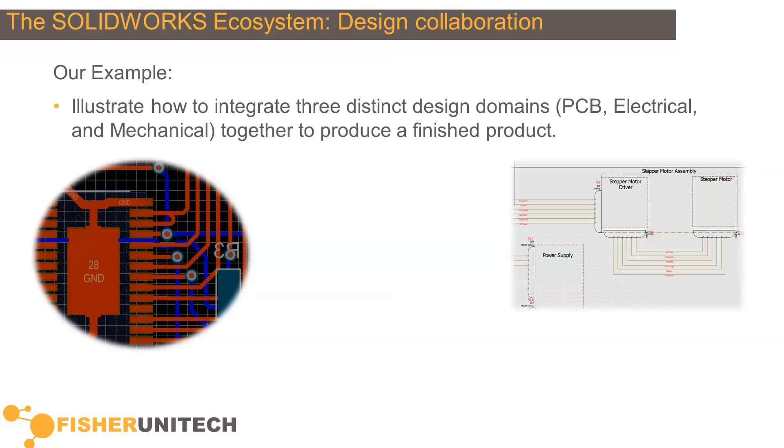All right, so what I want to do is illustrate how to integrate these three distinct design domains. We're going to look at the printed circuit board design, the system electrical design, and the mechanical, and how to put them all together to produce a finished product. And don't worry, I'm not going to do slides all night. We'll get to the software in a minute.

In order to do this, I'm going to be running three separate pieces of software: SolidWorks, SolidWorks Electrical, and this new product called SolidWorks PCB, previously known as PCB Works, which is from a company called Altium, if you're not familiar with them. If you look at our electrical product portfolio, you'll see SolidWorks PCB there as they continue expanding that whole product line. So you'll probably see a lot more in the electrical area from SolidWorks this year.

I put this design flow together, and this is what I call a traditional design flow. The way the products interconnect, you don't have to follow a flow like this. You can pretty much come up with any design flow you want, but this is the one I'm going to use tonight. We're going to start in SolidWorks and define the board outline,

and then push that over to PCB Works, and look at how those two things interface with the collaboration server, and we'll do some system wiring in SolidWorks Electrical. We'll jump back into SolidWorks to do the integration, and then follow it up by looking at how design revisions work between SolidWorks and SolidWorks PCB, and how we can get some of the copper information out of the circuit board for doing thermal analysis and stuff like that.

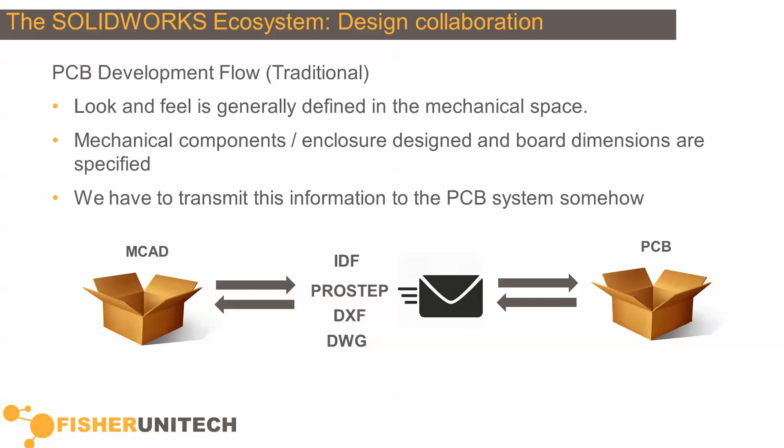The way it's typically done is the mechanical designer will generate a neutral file like a DXF or a DWG or EIEIO, and either email it or put it up on some shared storage device. Then the PCB designer has to take it, massage the data, jump up and down, swear a lot, and eventually get it into the PCB tool where he can do his component layout. And then at some point we have to update the mechanical space, so you have to reverse the whole thing. This goes on back and forth until you end up with something that looks a lot like this, which is really not what you want.

So what we're going to do is take a look at a little bit more of a desired flow here. One in which what we'd like to do is start on the mechanical side, creating the enclosure, defining our mechanical bits, and at the same time the PCB developer can be creating the schematic, doing circuit simulation, stuff like that, until we get the board shape defined where we can just push it across the table basically

over to the PCB space where we can do our initial component placement, push it back across the table into SolidWorks where we can check placement, we can do our interference checking, edit the assembly if we need to, and then push it back across the table so we can take it now and route it, and then the workflow will carry on from there.

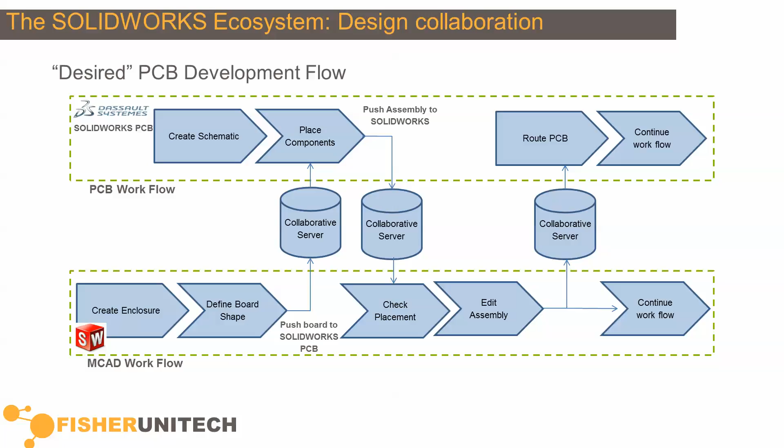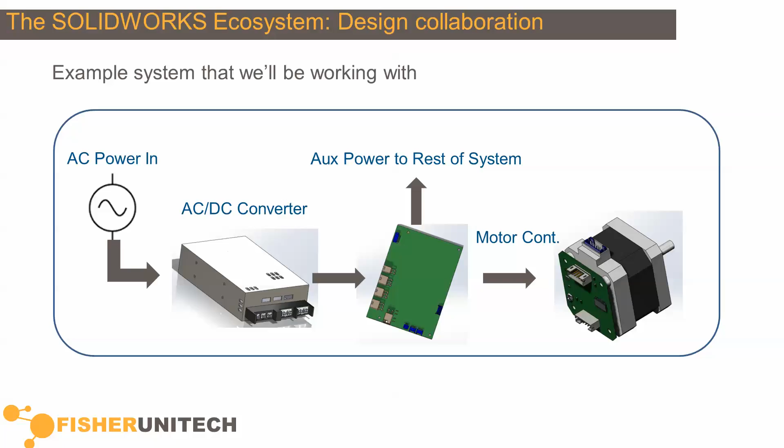So here's the system, and it's a simple example here, but basically we've got our AC power coming in, we've got our power supply, which feeds our main controller board, and there's secondary power supplies developed on there which are fed out to the rest of the system. And then we also are talking to our stepper motor, which has a stepper motor driver board, and that's actually where we're going to start our design here tonight.

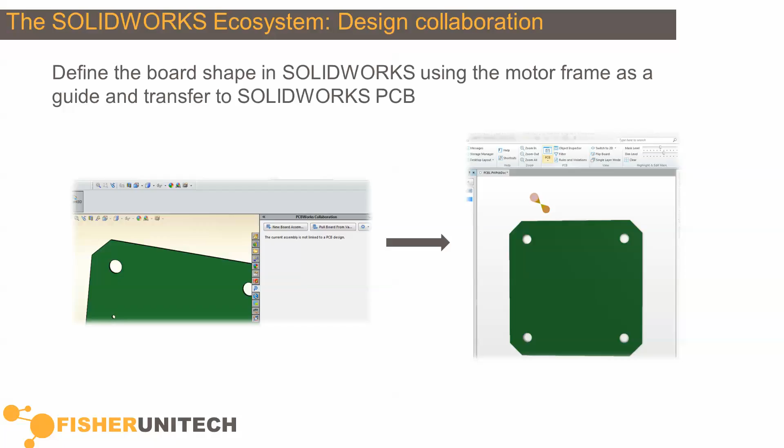And the way we're going to do that, like I said, we're going to define the board shape in SolidWorks using the motor frame as a guide, and then we're going to transfer that over to SolidWorks PCB. And the way we're going to do that is we're going to use these collaboration panels that we have in the applications. Once we do that, we're going to place the components in SolidWorks PCB, and then we're going to push it back over to SolidWorks so we can do our interference checking.

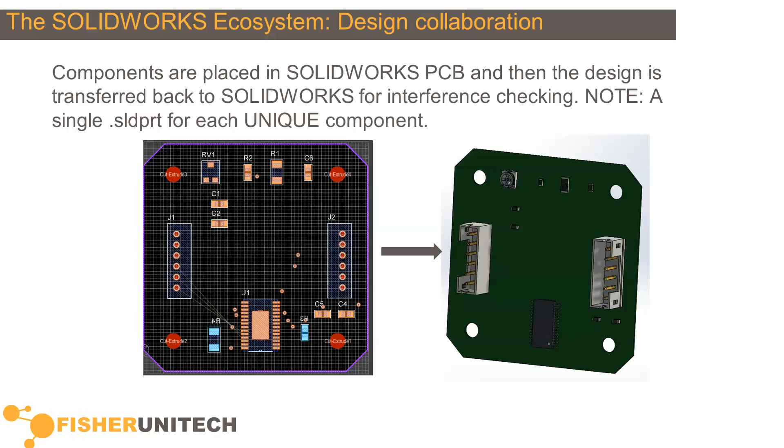And when we do that, we're going to create native SolidWorks SLDPRT components. But if we have like 150 bypass caps, for example, we're not going to create 150 SLDPRT files. We're only going to create one for each unique component, which is a little bit different than what happens with a lot of these neutral file translators. So something to keep in mind.

When you say interference, is it mechanical or electrical? Yep, mechanical interference, yep.

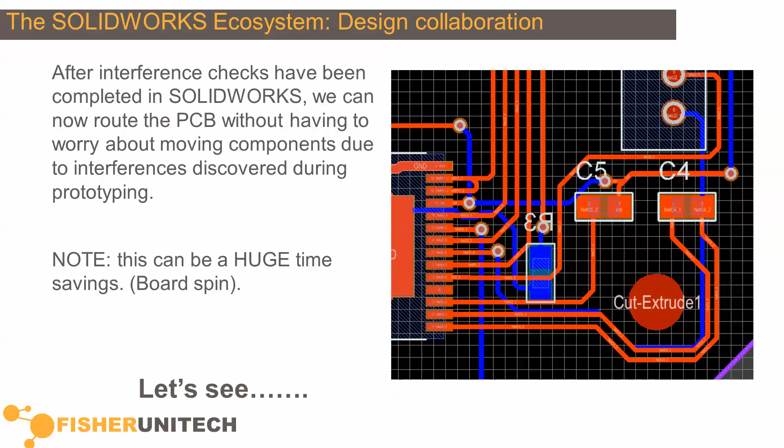So after we do the interference checks, then we can go ahead and start routing the PCB without being too worried about finding out some surprises when we get it back from prototyping. And this is where you can save a huge amount of time, because you want to make sure you get all those checks done before you do the routing, because if you have to do that after you've routed the board, then that's when you can really lose a lot of time. So let's go ahead and take a look at how we can do that.

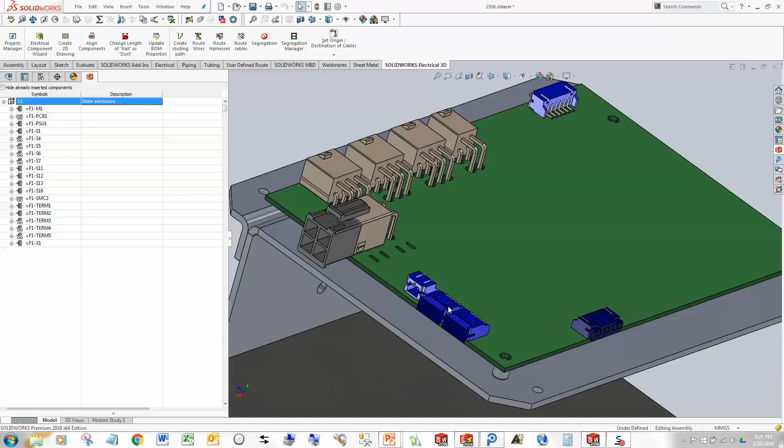So I'm going to start right here in SolidWorks, and you can see it's a simple little project, but we've got our AC input here, got our power supply, we've got some bracketry to bolt it all to the rest of the assembly, and then we've got our main controller board here, and then here we have our stepper motor, and that's actually where we're going to start things out, because this is where we want to define our board shape here.

And the way we're going to do that is we're going to click over here. You can see we've got this collaboration panel available to us. We're just going to go ahead and create a new board assembly, and we're going to link the assembly to a project that's already been created in PCBWorks or SolidWorks PCB. So we're going to just go ahead and click OK, and then we just have to save the assembly, as soon as my hard drive wakes up.

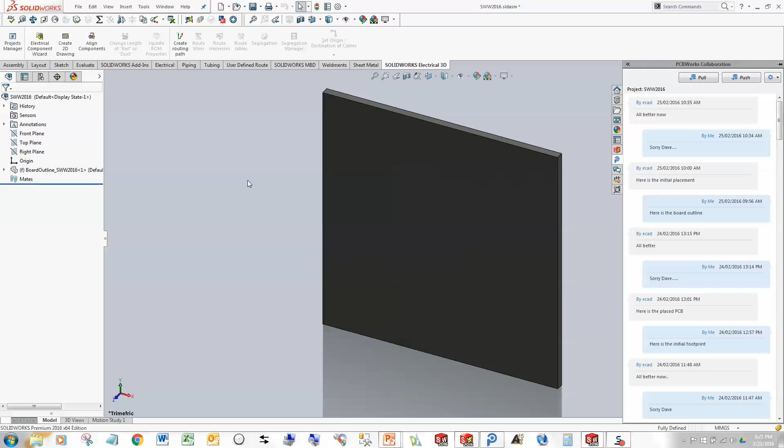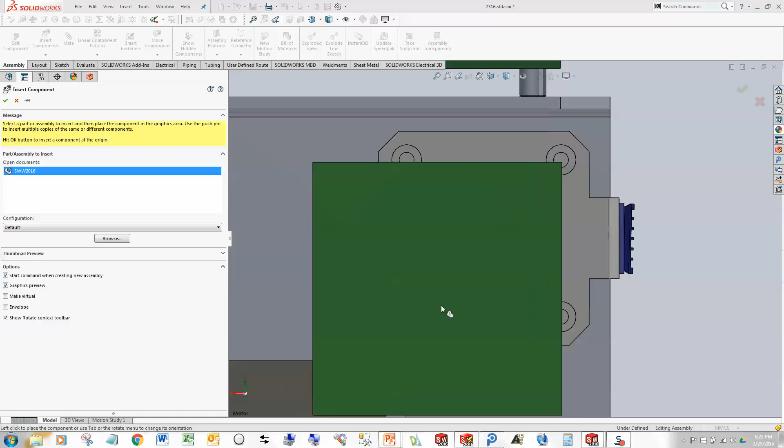And then what this does is it just builds us a default PCB outline just to sort of start with. So we're just going to make this kind of look like a PCB here for starters. And then we're going to hop back over in here, and we're just going to place our PCB in our assembly here. And then we're just going to go ahead and mate it here.

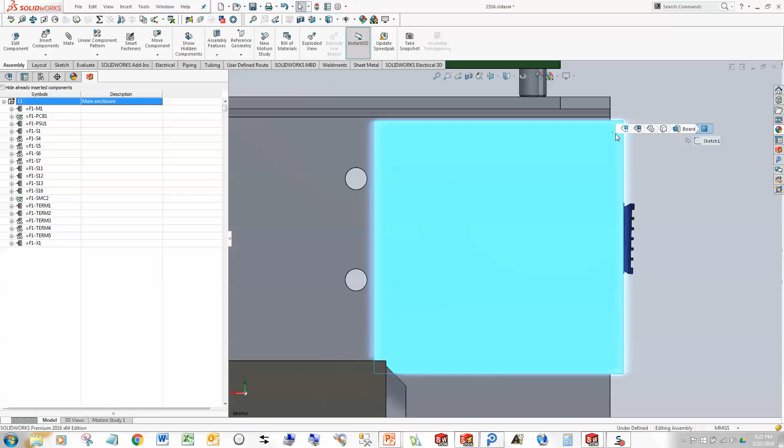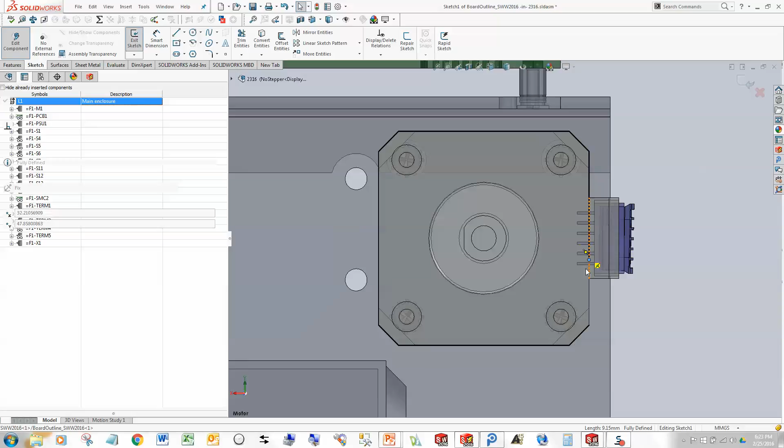Then we're just going to go ahead and edit our outline here, and we're actually going to just get rid of that, right? Because what we want to do is use this outline of the motor here to create our board outline. We're going to get rid of this bump out for the connector here, like so. And then while we're at it, we're going to create some mounting holes here.

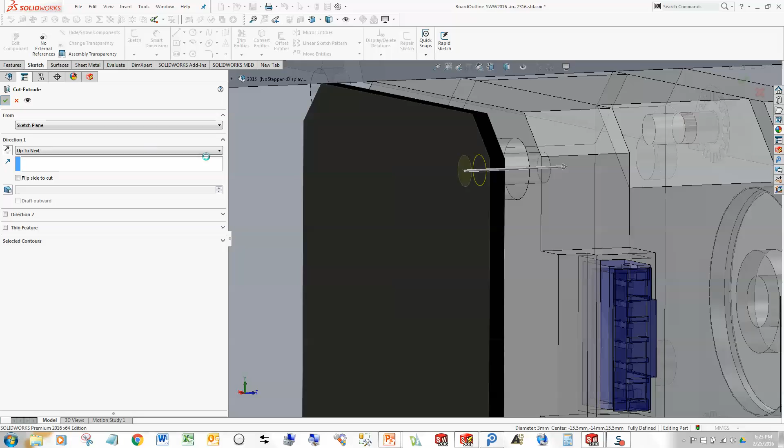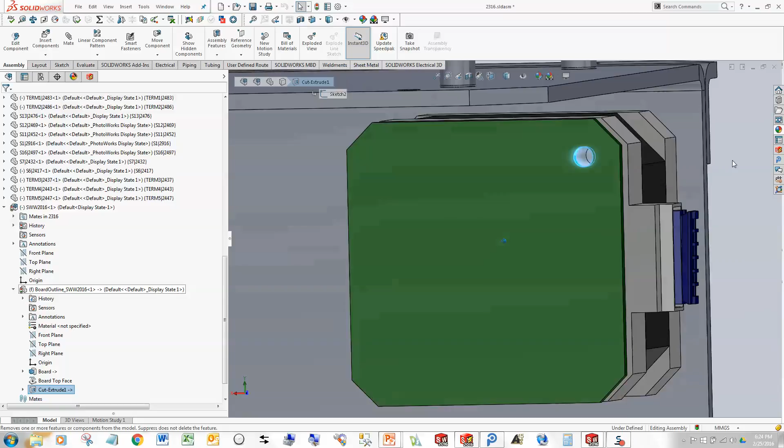And now what you would normally want to do is go ahead and convert all these mounting holes and extrude them all in one step here, but you would be doing a bad thing if you did that, because one of the restrictions with the collaborative server here is you have to create all of these features as separate cut extrude features. You can't do them all at once. You can't do a pattern array. Really the only way to do it is to create them all individually. So that's really the only caveat there.

So once we get all that defined, we're just going to hop over here in our circuit board assembly, and we're going to open up the collaboration panel again. And we're just going to push this over to SolidWorks PCB.

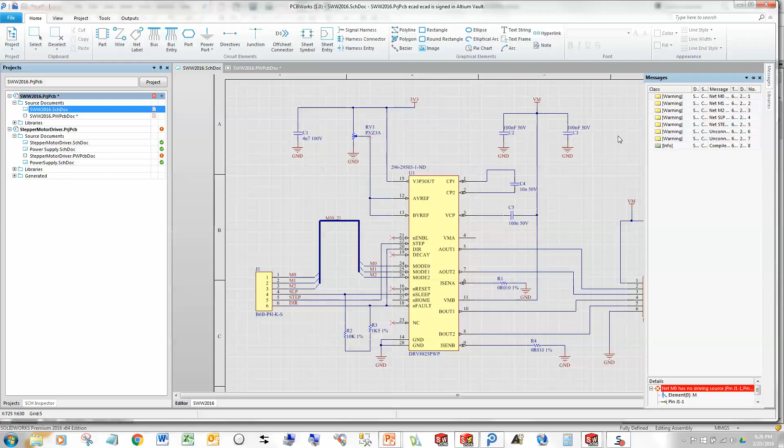So then what we're going to do is what's called a compile here. What that does is just run an ERC check to make sure we have everything hooked up right. And if we would have gotten any errors, this message panel would have popped out with errors in them. You can see there's some warnings here, but those aren't show breakers. So we're going to go ahead and push all this information over to the PCB editor now. So we're going to update the PCB with all the content that we have in our schematic tool here.

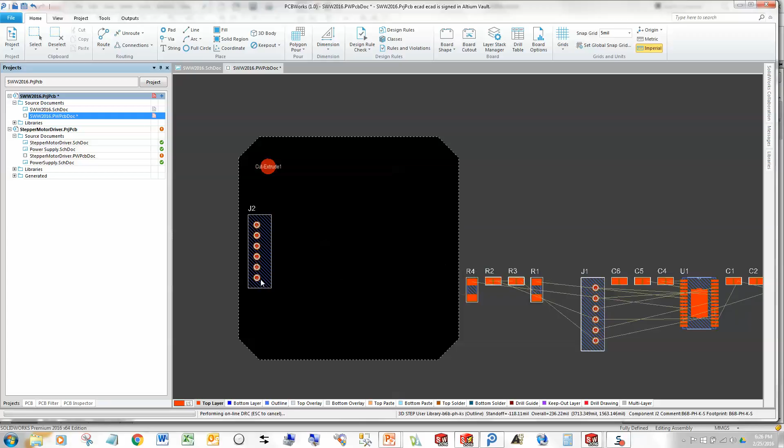And when we do that, you can see it throws all the components over here on the side of the board. And so now we can go ahead and place them. Now again, this is a simple design. And if you were doing this for real, you'd take a lot more care in where you're placing things. But I'm just going to go ahead and throw these things on there. Grab these last caps here and we'll put them right here.

And then the thing to note here is this is only a 2-layer board. Matter of fact, we can go to the layer stack manager here. You can see we've just got a top and bottom layer. Now this will support up to 32 layers, but this is just a pretty simple design. And you can see we've got the top layer defined as red and the bottom layer defined as blue.

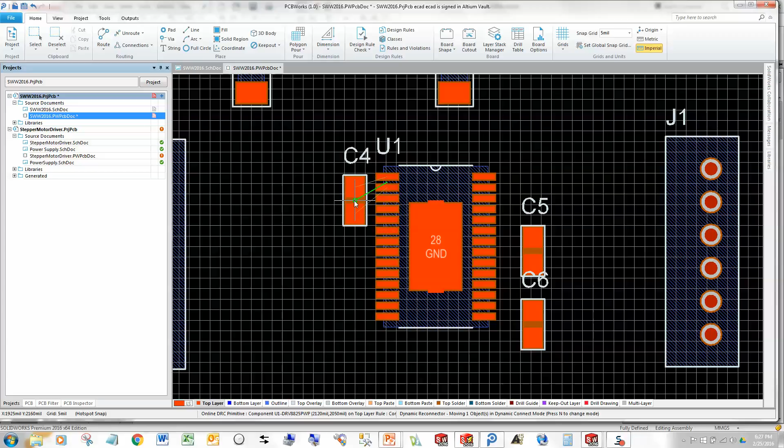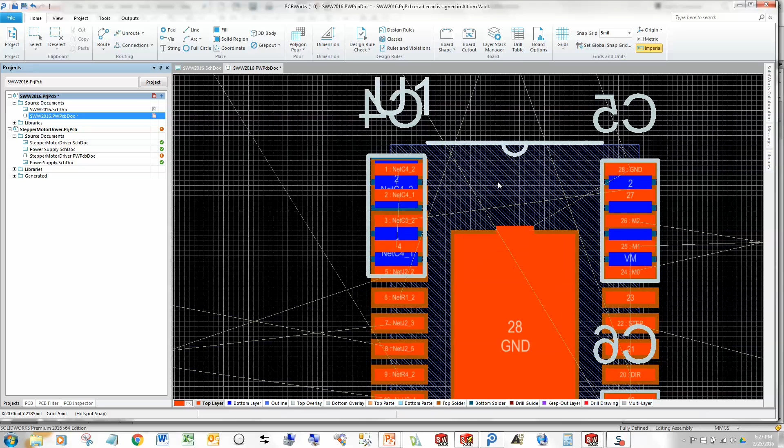And the reason I want to show you that is if we wanted to, for example, get these bypass caps close to some power rails here, if we bring this over, you can see this guy changes green, and that's the universal sign in SolidWorks PCB that you're violating some design rules here. So what we can do is just go ahead and flip that over on the bottom so we don't have that problem. So we're just going to take these guys and put them all on the bottom like so.

And then you'll also notice these components have these little grayed out outlines in them. What that means is that there's actually 3D models attached to all these components, and we can visualize it if we go into the 3D mode here. You can see all the components there, and we can check those caps that we put on the back of the board, make sure they're where we think they should be.

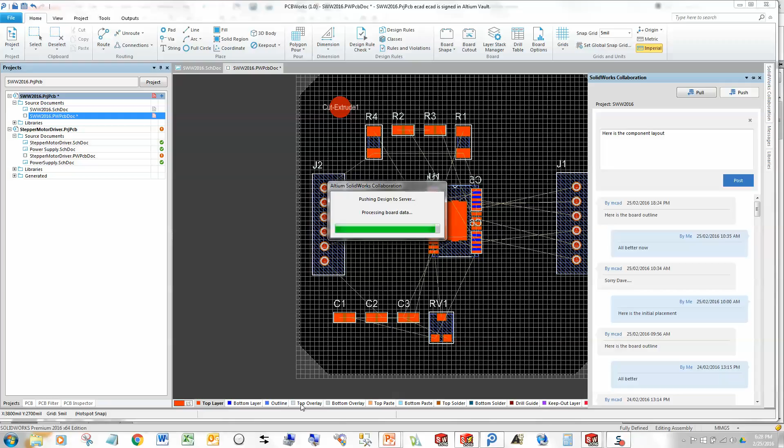And then when you get all that set, what you're going to do is just push this back across, say here is the component layout, and we're going to push that into the collaborative server. Takes a couple seconds, and then once we get that all squared away,

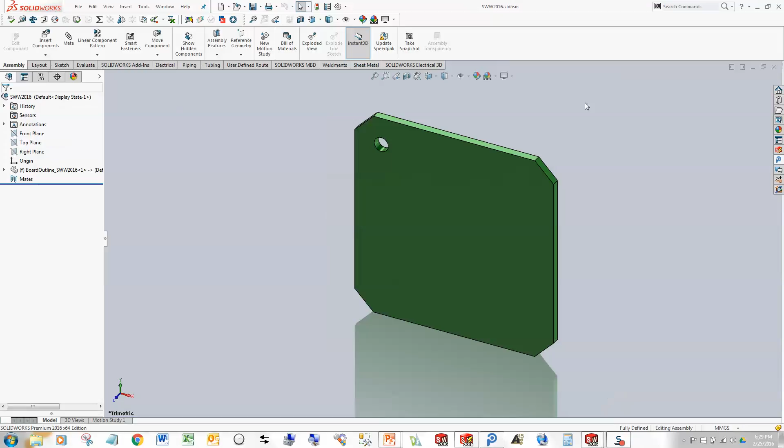we'll go back into our board assembly here, and we'll access the collaborative panel again. We get into the right, there we go, into our assembly there. And you can see again we got a little message here that says there's changes, so we're going to go ahead and bring those in, and I'm just going to go ahead and check them all.

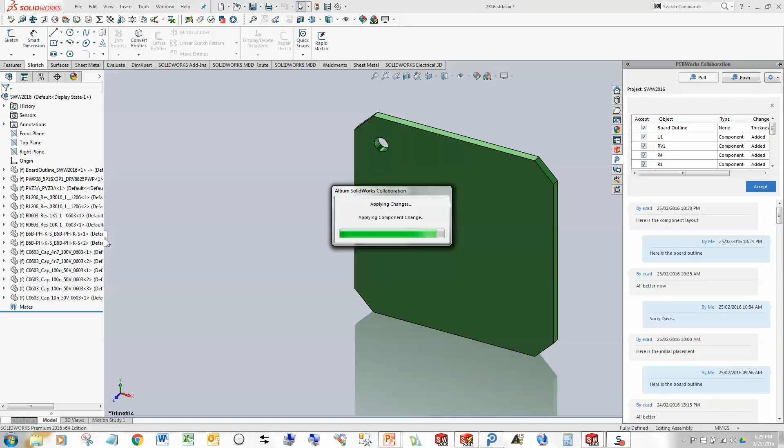And you can see the feature manager tree over here is populating with those components. Alright, once it's all done, we can see we've got all that, and we've got all the reference designators here, so we know what's what, R4, R1, R3, and we've got all native SolidWorks parts here.

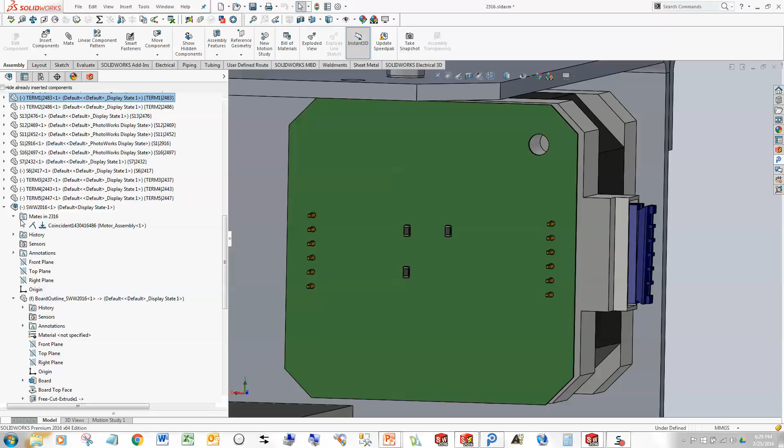So if we go back over to the assembly, and like I said, I've got this thing, I put it in the wrong way here, so I'm going to go ahead and get rid of this mate. And we'll go ahead and flip this guy around here, like so. And so now we've got our board pretty much all defined there. All right, let's hop back here so we keep on track.

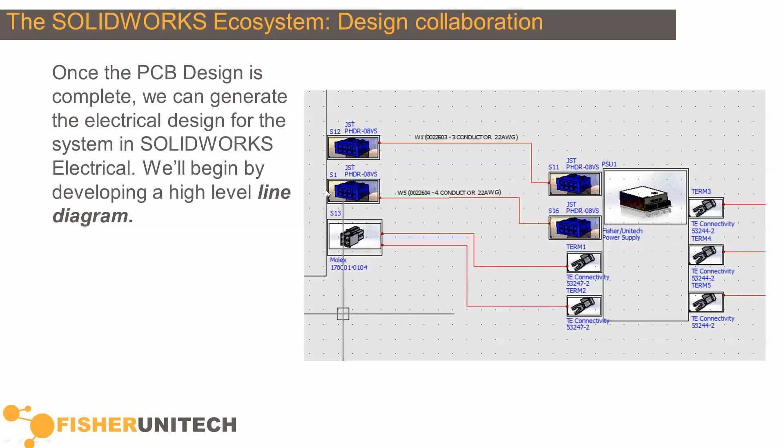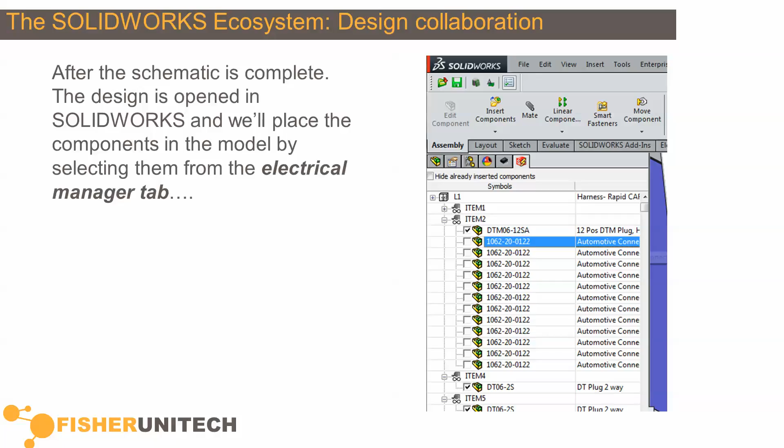So once we get the PCB design done, now we've got to basically finish up our electrical system design, and we're going to start in the line diagram, and then we're going to jump over onto the schematic where we'll finish up doing our detailed connection points. And then we'll jump back over into SolidWorks, and we'll place the components using the electrical manager tab. And then we'll go ahead and place the connectors there where they need to mate up on the circuit board.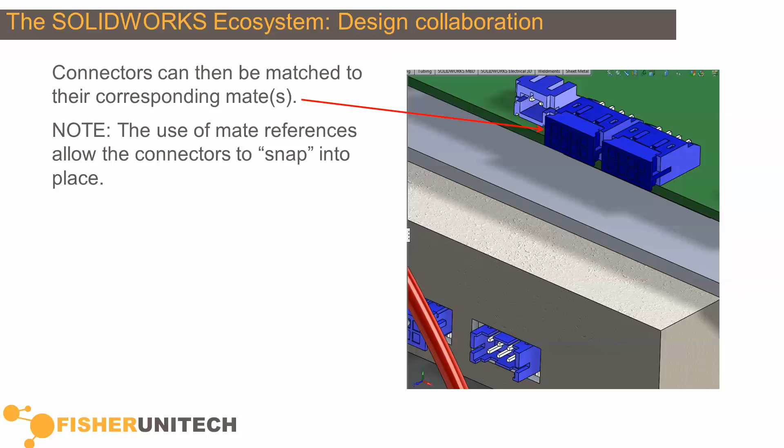And thing to note for you mechanical people, you definitely want to put mate references on your parts so your electrical guys don't hurt themselves trying to put these things into assemblies, because it's been known to happen. So then once we get all that done, we'll go ahead and route the wires and cables using the route commands in SolidWorks. And then, of course, we'll have length information associated to all the wires and cables, and then we can extract that when we run our reports, so we can have accurate material lists.

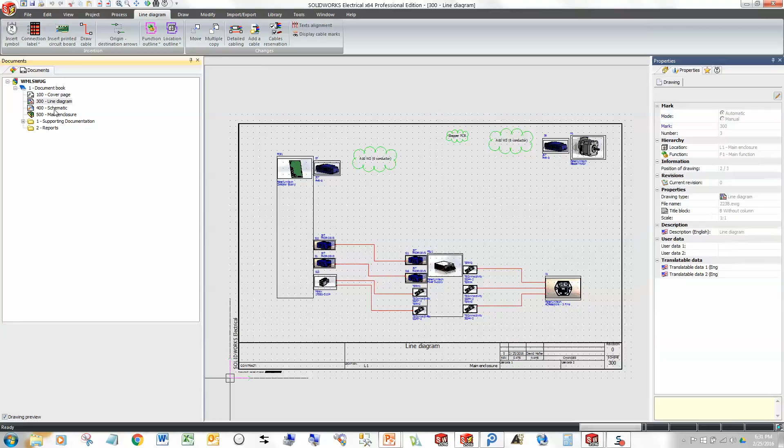Let's go ahead and take a look at that. And I'm going to go ahead and open up the line diagram and the schematic here. And this is all actually an electrical project that we've been working on here. And you can see we've got to add our stepper motor controller board and all that. So I'm going to go over here onto the side panel, and I'm going to grab a stepper motor board, and I'll put it in here. And I'm going to go ahead and associate that to a part number that I already have for it as soon as my hard drive wakes up. Here we go.

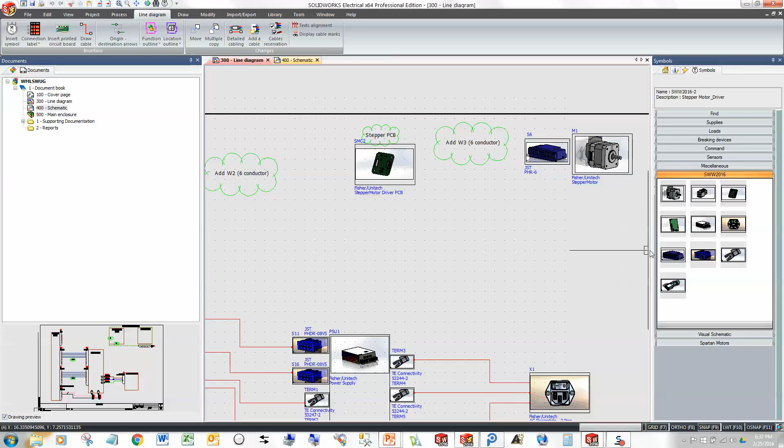And then we need to add the connectors here to attach to our cables. So I'm going to put one over here to go to the main controller board. And I'm going to put one over on this side to go to the stepper motor. And then once we have that, we just really need to connect them up.

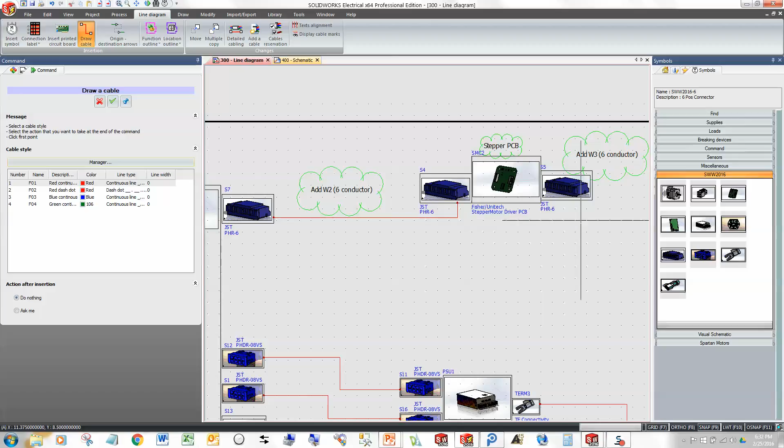What version of SolidWorks is this? This is 2016. Does the 2015 version have the same library on the right? It's got the same panels, but they're over on the left-hand side. Yeah, and I'll show you that after we're done here. Remind me to show you because there's some other features here associated with that.

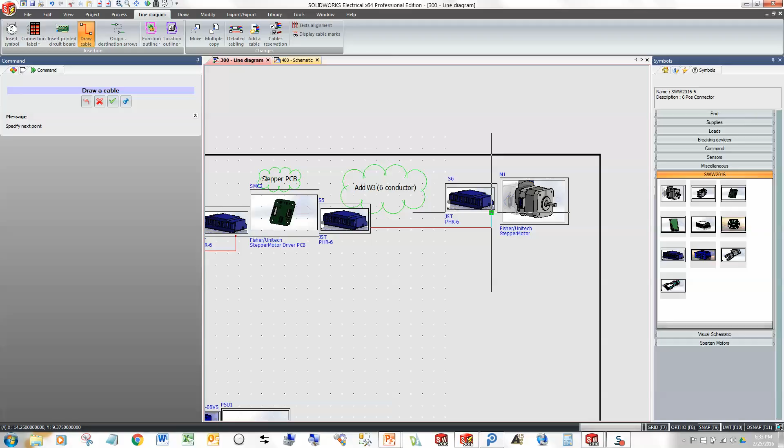Okay. Yeah. What are you guys using, Phil? Right now I'm trying to integrate SolidWorks Electrical. Right now we use DriveSite. Everything is kind of, yeah, so we're trying to merge and get this going. Gotcha. It's just taking a little longer.

So then I'm just going to reserve these cables here. I've got some cables in here in my design, and so I've got a couple of 6 conductor core cables here that I'm going to use for these guys, and I'm just going to associate those.

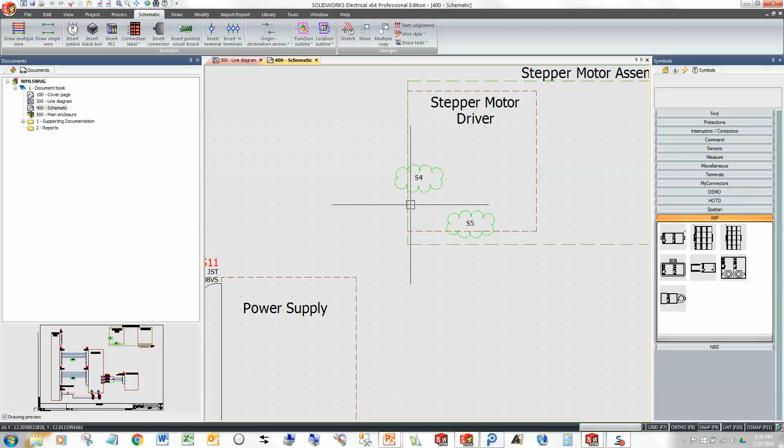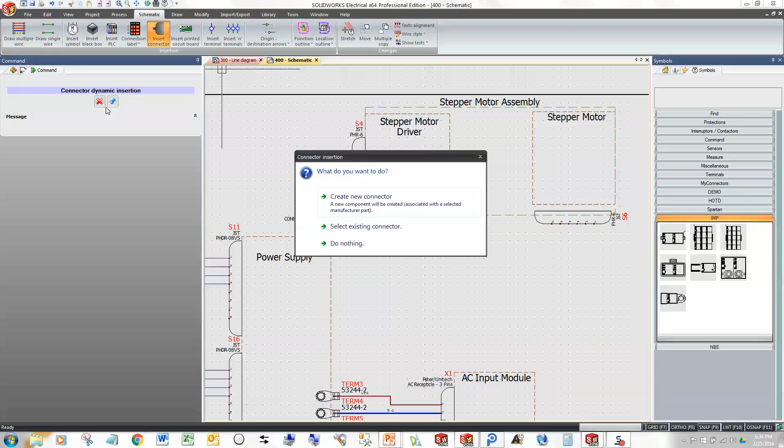And then once we get those all set, we can hop over into our schematic and add the detailed connection information. So I'm going to add those connectors over here as well, but I'm not going to use the symbol palette. I'm going to use the dynamic connector tool here, and I'm going to use the component information to actually build the number of terminals that I need sort of on the fly. So it's kind of a nice tool. And so you don't have to use symbols all the time if you don't want to. I'll just set that in there. I'll do the same thing for S5 here.

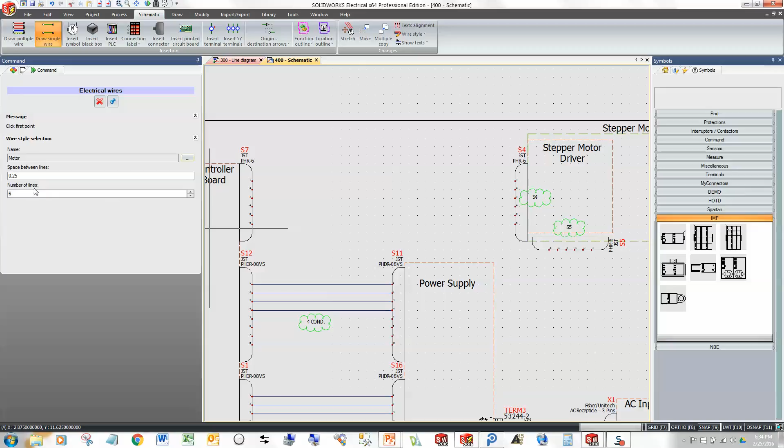And then I'm just going to turn off some of these annoying description attributes here to get them out of the way. And then we just need to draw our conductor cores over there. And I'm going to use the motor wire style, oddly enough. And then I'm going to give it 6. The number of lines is 6 because it's a 6-position connector. And I'll do the same for these guys here.

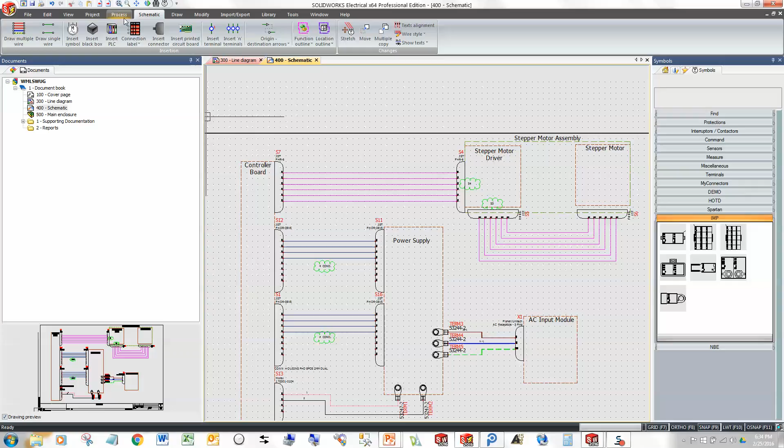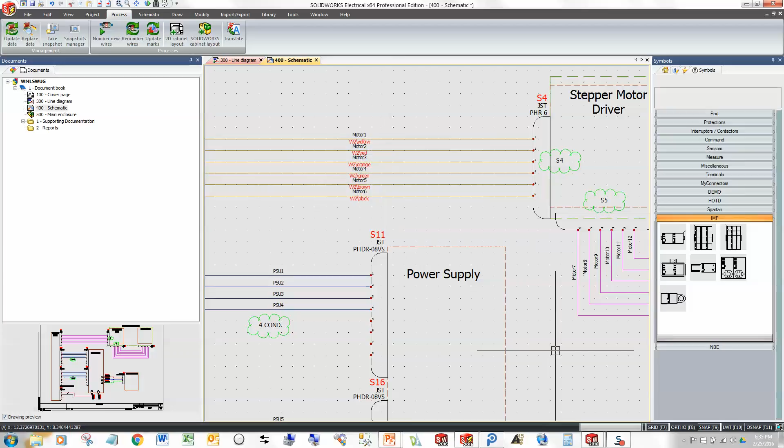And then once we get those done, just go ahead and number our wires. So we've got those numbered. And then I'm just going to associate those cable cores to these cables that we already have identified here. Let me open this up a little bit. And then we'll do the same thing over here to this guy.

Man, that's a loud clock.

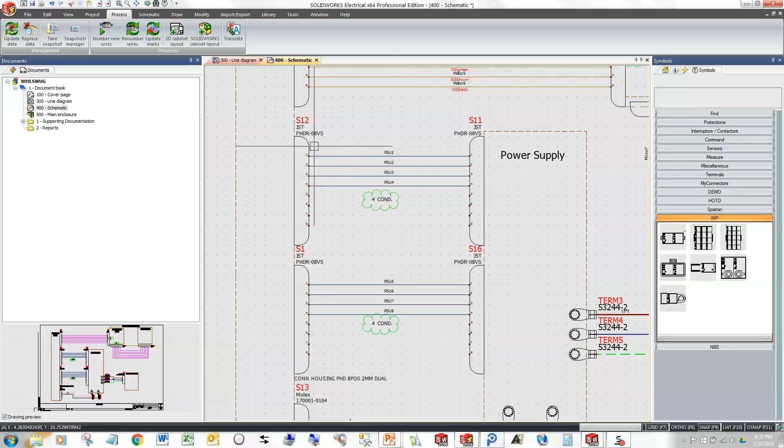Alright, now the last thing we need to do here is I've got these 4 connectors and the wires that go between them. I'm going to actually make a harness out of this. So I'm just going to select these, and I'm going to add this to this harness I have here, H1. And we should be good to go there. So let's hop back over into SolidWorks.

And we're going to go ahead and place our connectors here for this. So we're going to swing around here, and we're going to use the component electrical manager over here. And I'm actually going to hide all of the components that are already placed because I just want to see the ones that I need to place. So we'll go ahead and put S4 in here. We'll add S5.

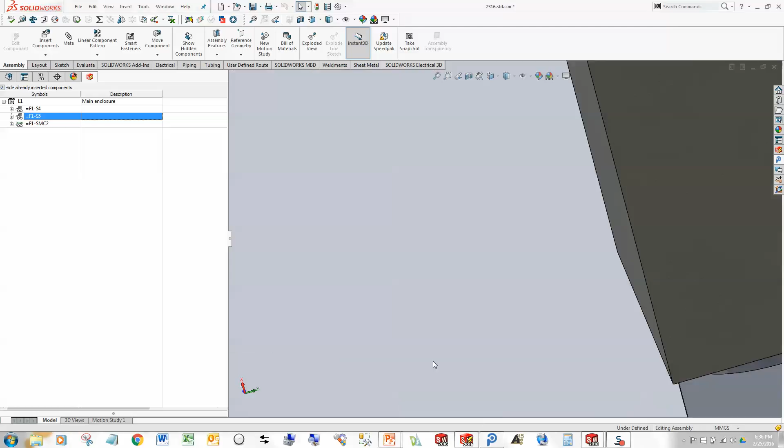And then we're going to swing around here. And then we're going to go ahead and use some of the electrical commands on the 3D tab here. We'll start out with our harness. We'll get that guy going. And then once that's done, we're going to go ahead and route our cables. Just have two of them, so it shouldn't be too long.

Here's a good place where if you have any really good jokes, you might want to throw them in.

I have a question though. Are these, you're jumping to these different programs or modules? Like if you buy the electrical package, do you get all these? Do you have to buy them? Are they a la carte or how does that work? Well, that's a little bit of a discussion there, so hold that thought. Okay, that's fine. Let me get through this, because that's a good question actually.

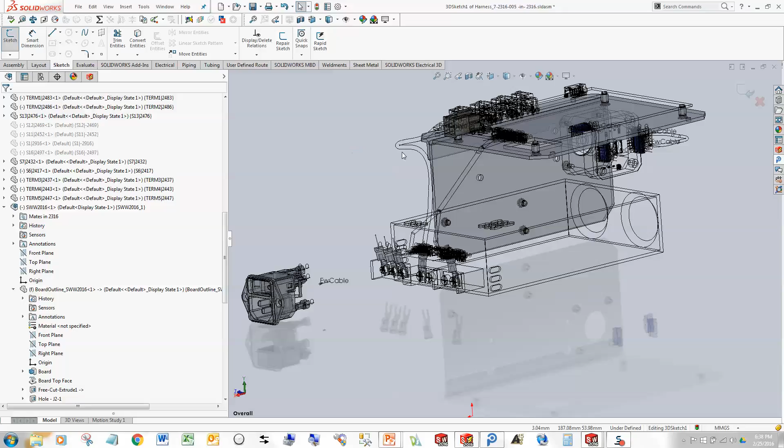And then the last thing we're going to do is just route our wires here. And the wires are going to take a little bit longer because what happens is it creates a wire route assembly for each different wire style. And because I happen to have, for the power supply, AC input and the power supply going up here, I happen to use actually all 5 different wire styles. So it's actually going to create 5 separate route assemblies. So if these were all one wire style, it would take a lot less time to route, I guess is what I'm trying to say.

Trap for young players.

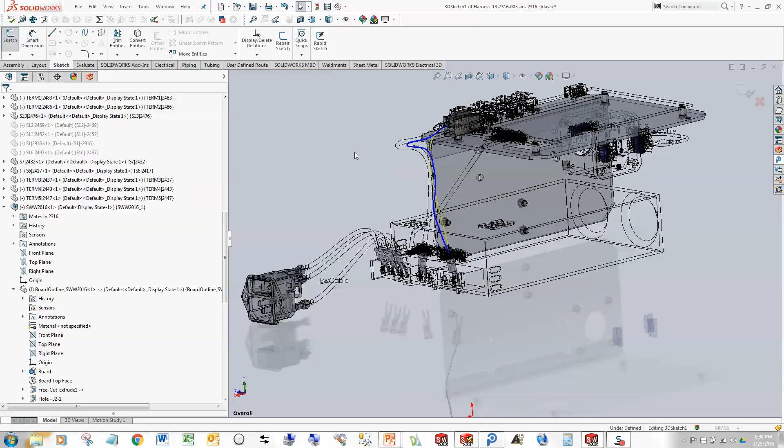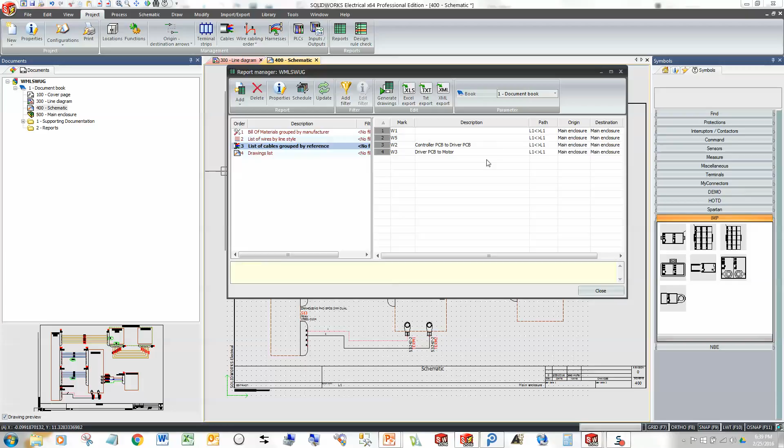Okay, last wire. All right, so now we've got all our cables and everything routed. Let's take a look. Looks like everything's pretty good there. Let's go ahead and hop back over into electrical, and then we can go ahead and look at our reports. And you can see we've got length information now on our wires, which is always good. And we've got cable and length information on our cables, at least the ones that we've used. We've got a couple of them we haven't used yet.

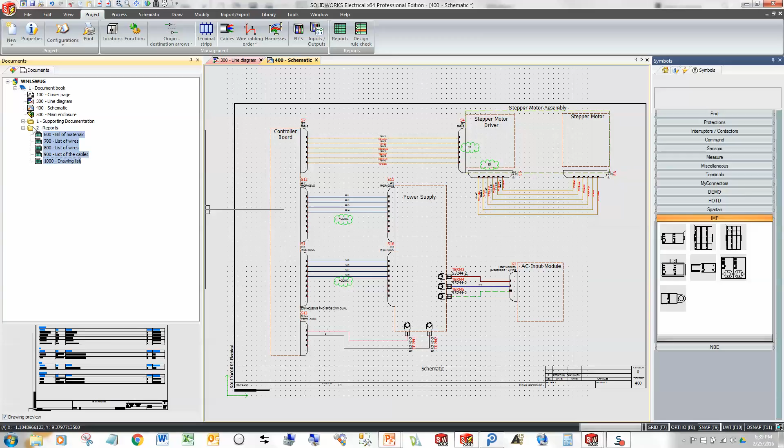So we're just going to go ahead and I'll just generate these ones here that I selected. And they'll populate over here in the Documents Manager. And then what I like to do is I like to make these folders in here where I can just throw everything in, just sort of keeps everything organized. And we can see we've got our bill of materials, got our list of wires that have length information on them now, so we know how long everything needs to be.

Same with our cables. But you can see we've got W1 and W5 we didn't really use, so they don't have any length on them. So something to note, if it's in the design, it's going to be in the reports. And if it's not in the design, it won't show up in the report. So everything's linked together. All right. So let's jump back over here.

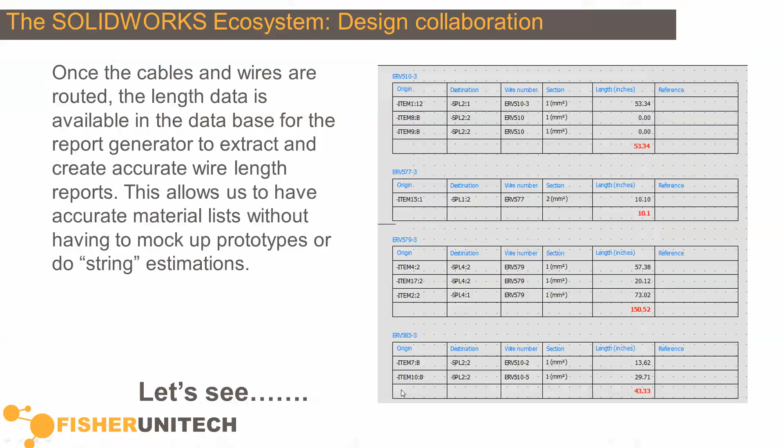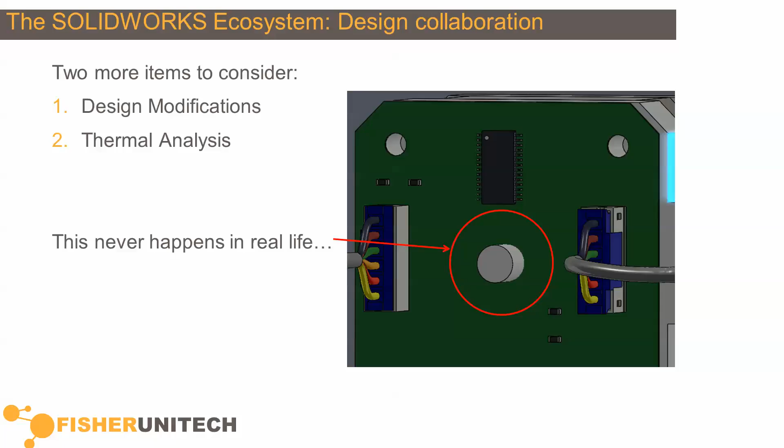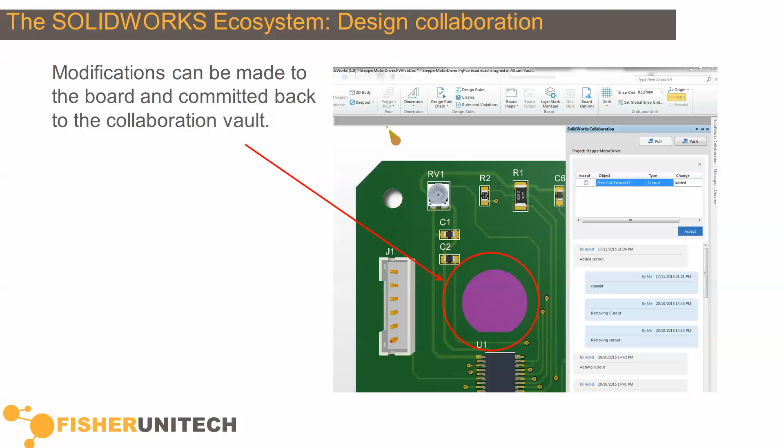And so we really only have 2 more things to consider. Design modifications, and we'll look at how to get the copper over to do thermal analysis. So one of the things here is something that never happens in real life, right? You never have this kind of stuff happen. Design changes or surprises that come up. And so what we can do is we can easily make these modifications now and just push them back over to PCB Works without a whole lot of trouble. And then we'll take a look at pushing copper geometry over into SolidWorks, so we can do real thermal analysis now with these tools.

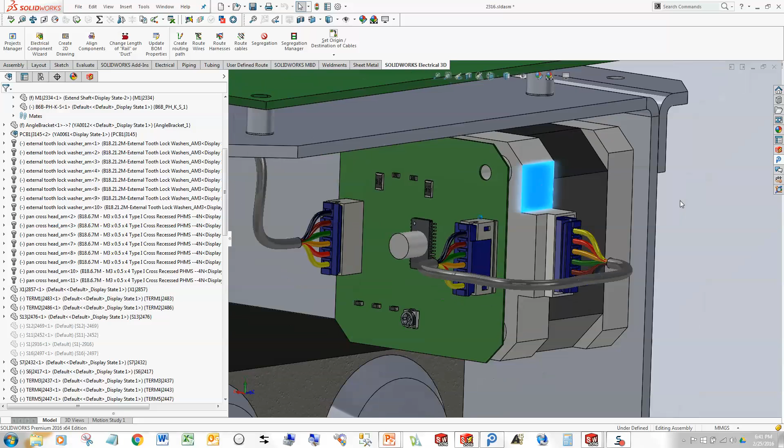So let's take a look at that. Let's go back into our assembly here. And what we're going to look at is finding out that, well, gee whiz, we really can't get the configuration of motor that we really want. The only one we can actually get is this one that's got an extended shaft in the back for an encoder to go on. So now we've got this little problem here.

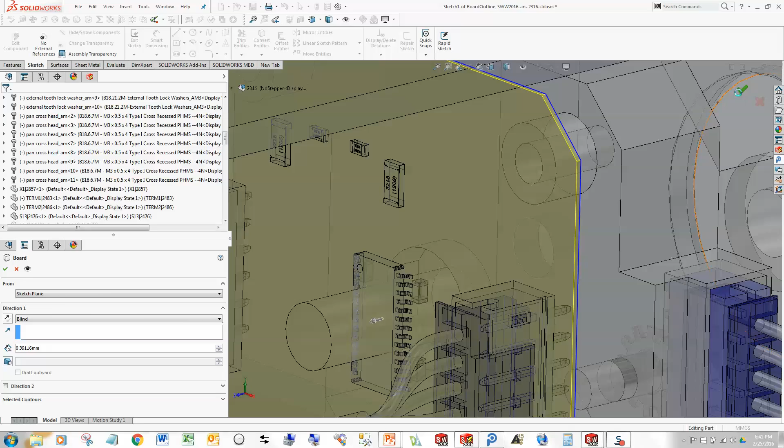So what we're going to do is we're going to create a cutout in the board. And go ahead and edit that guy. And we're just going to create another sketch here. We're going to use this shaft cutout here in the motor to make our cutout in the board here.

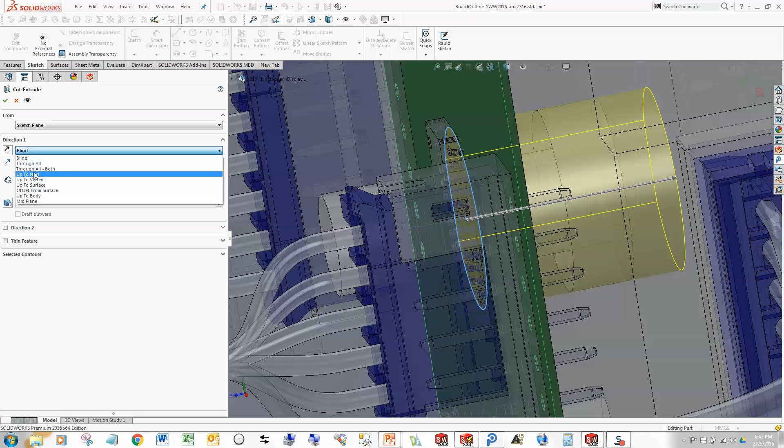Okay, so now we've got our board cut out, but we still got a little bit of a problem here. So what we're going to do is we're going to go back into our PC board assembly, and we're going to push this back over to PCB Works or SolidWorks PCB if you desire.

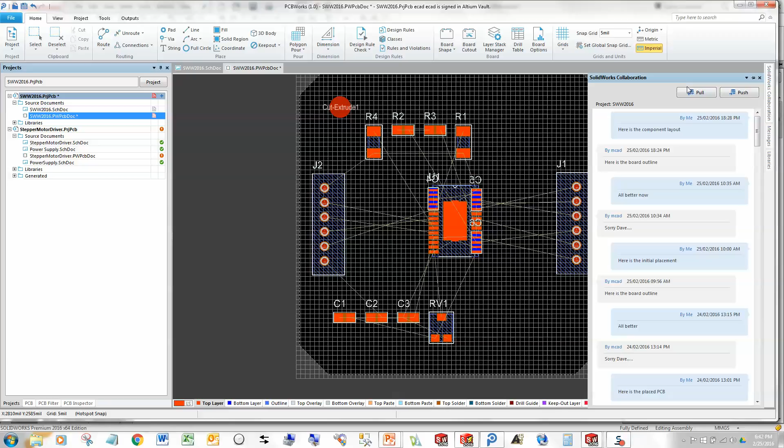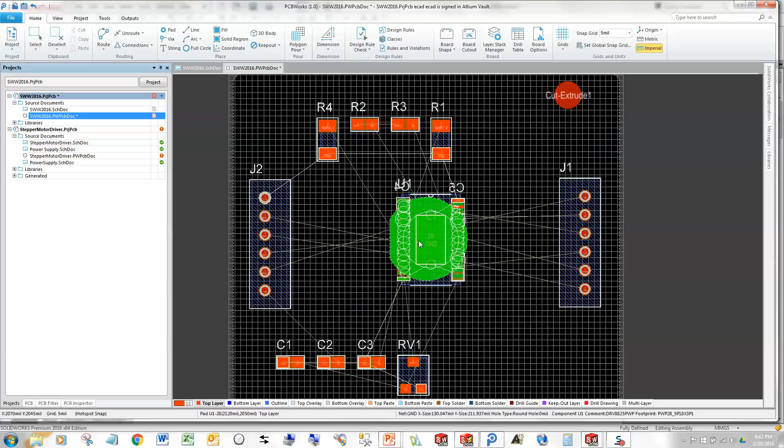And then we're actually just going to pull that information out of the vault there. And then when we do, you can see we've got these design rule violations here. That's what the green color is. So we're going to have to take care of that. We'll just move everything out of the way here. Put it up over here in the corner until we clear our violation there.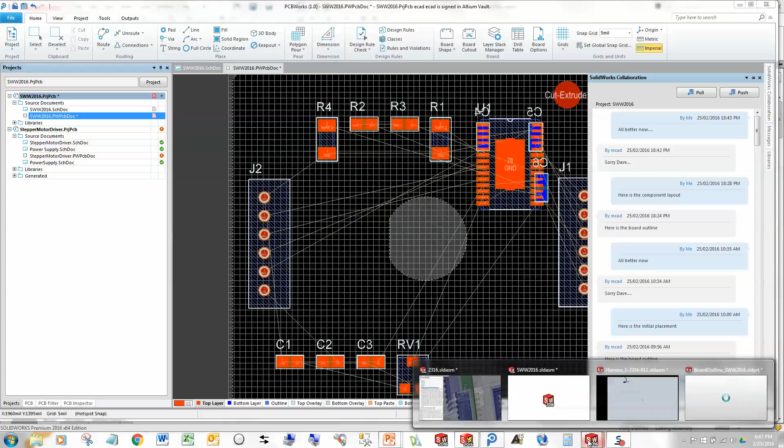And again, we can go ahead and visualize that in 3D, make sure everything is where we think it needs to be, and then we can just take and push that back over again. All better now. So we can go back into our board assembly, pull this stuff out of the vault. Let's go ahead and select the changes, because I know they're right because I did them. No sense in reviewing them unless you're schizophrenic, and then you might want to do that.

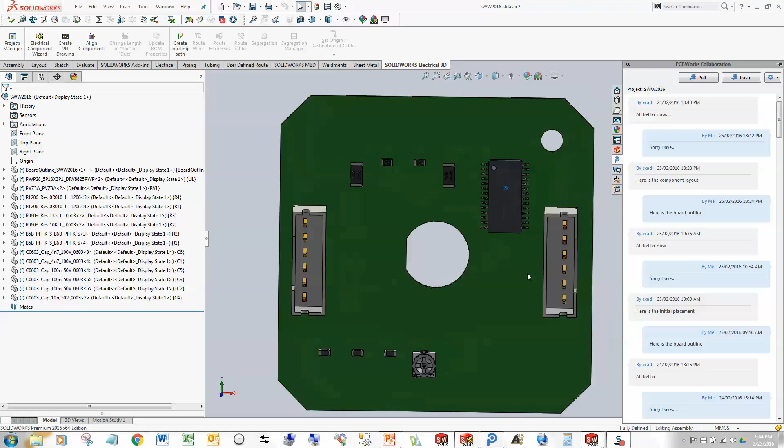Okay, so now we've got our rebuilt PCB assembly. We can hop back over in SolidWorks. Oh, life is good. All right. So now that we've got all that taken care of, I'm going to hop back into SolidWorks PCB, and I'm going to actually open up another circuit board where everything's already been routed. It doesn't have the cutout in it, but you can see we've got all the traces routed here.

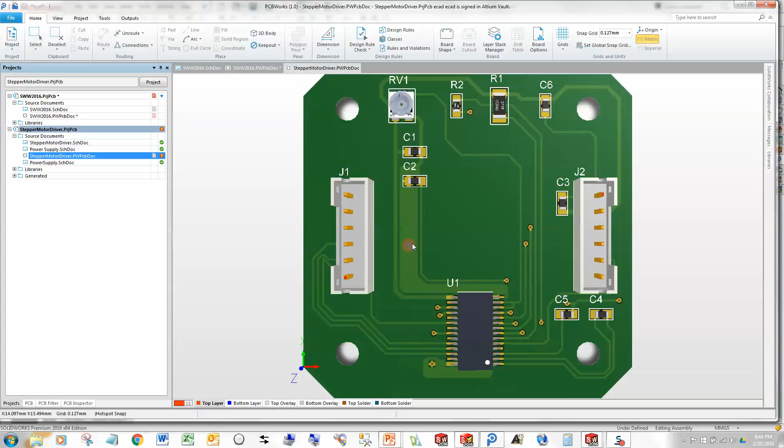And what we're going to do is we're going to go up here and we're going to actually generate some copper information. I'm just going to put this in the same spot as I have the other parts. And the nice part about this is you can get rid of a lot of the detail in the 3D bodies. A lot of times when we do simulation, we like to get rid of a lot of the detail so we can just generate simplified bodies here. I'm just going to leave the default here, and then I'm going to actually select to export all the copper.

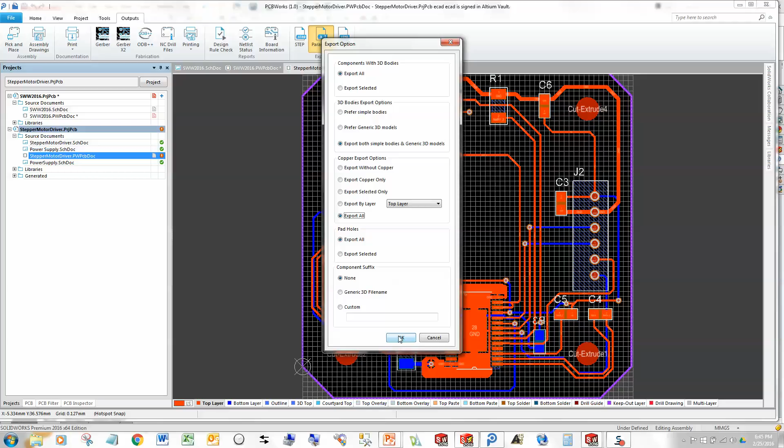If you had a board with like thousands of vias in it, you probably would not want to have those all exported, but this is just a small design, so I'll go ahead and export everything for you here. And once we're done, we can hop back into SolidWorks, and we'll go ahead and open that file that we just generated. And we'll let that load up.

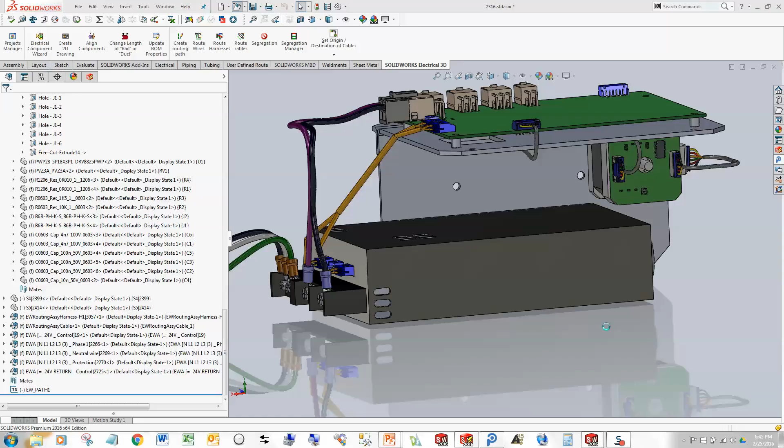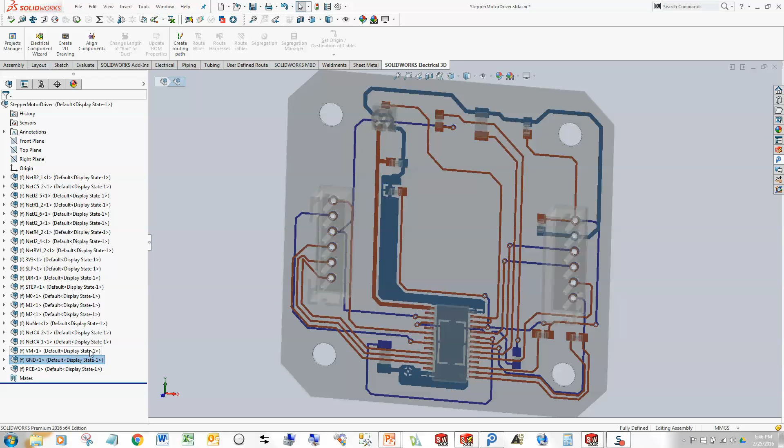Okay, so now to the casual observer, this might look a lot like the one we were just modifying there. However, it's not exactly the same. If we bring this up and we change the transparency on the board itself, oh, look at that. It's a thing of beauty. And we've actually gotten our net names here. So if I want to take a look at the ground net here, I can do that. The supply for the motor here.

And then the really nice thing is we're actually able to bring all the information from the vias and everything in here. So we have all of the barrel information in there. So now we can actually do some thermal analysis if we want. So that's enough to bring tears to your eyes.

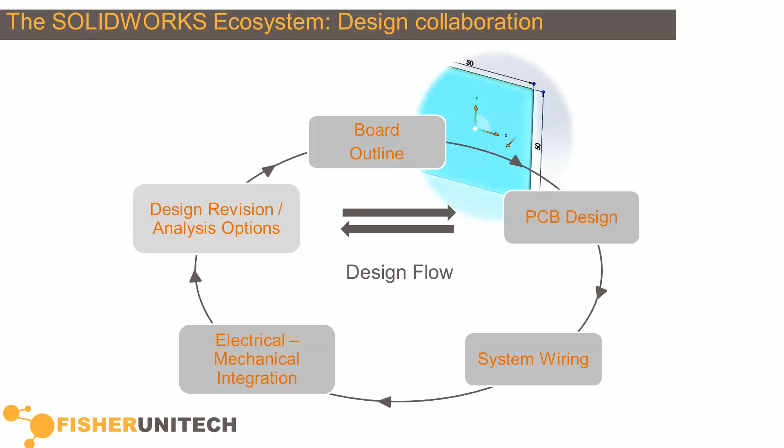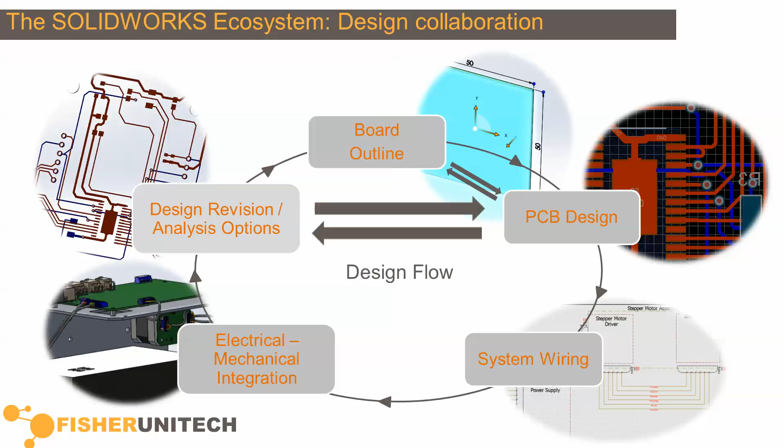Okay, so let's just recap. So we generated the board outline in SolidWorks, pushed it over to SolidWorks PCB. We took a look at the collaboration server there and how that works, did the system wiring, jumped back into SolidWorks, did the integration, and then at the end there, of course, we took a look at the design revisions and how the analysis options work, and I'm a little bit slow.

I'm 5 or 10 minutes slow, but that's okay. Pretty close. All right. Let's get rid of that.